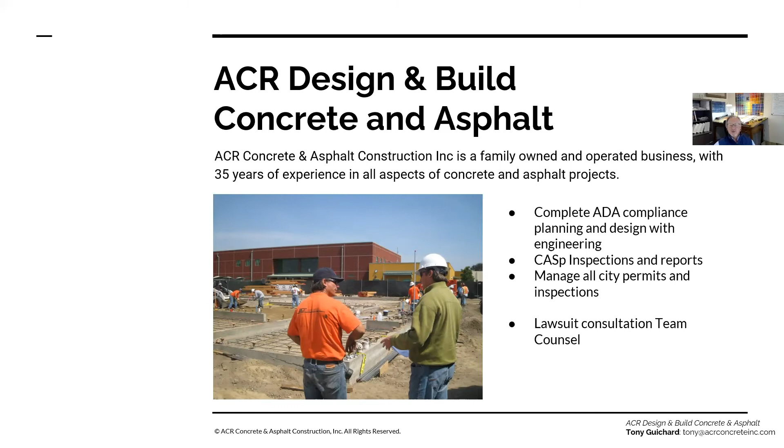I myself have been doing this for over 35 years. I carry a number of contractors' licenses, ranging from the highest, an A license, which is a general engineering license, to a B license, and multiple C licenses or specialty licenses with concrete, grading, compaction, things of that nature.

We'll just briefly go over the agenda for today on what we're going to be doing or discussing. Today we're going to be talking about retail shopping centers, the current state, the epidemic of ADA lawsuits and why they're growing, how to be proactive with your CASP report, the design, which is critical. You're going to hear me talk quite a bit and use

sentences such as the accessible route and the path of travel. Those seem to be lost with most with regards to ADA compliance. Corrections, CASP reinspection, and why that is critical. The ADA lawsuit, the case study themselves, we're going to actually review a complaint and the allegations within it, the importance of the CASP inspection in the report, good ones, bad ones, reviewing the actual property correctly for ADA compliance, and how to correct or bring the property into full compliance. So those are a couple of the items on the agenda today. And again, keep in mind, we're going to take a couple breaks here to field some questions.

The current state of retail and commercial centers. We're going to talk a little bit about the challenges owners face. Currently, with COVID-19, the owners are facing loss of rental income. A lot of these tenants that had to close up their businesses, the nail salons, the small restaurants, the donut shops, things of that nature have gone away. Some of them have been caught up in lawsuits, and the lawsuit settlement demand has been to a point where they couldn't sustain, and they had to close their doors. Now the owners are looking at a loss of rental income.

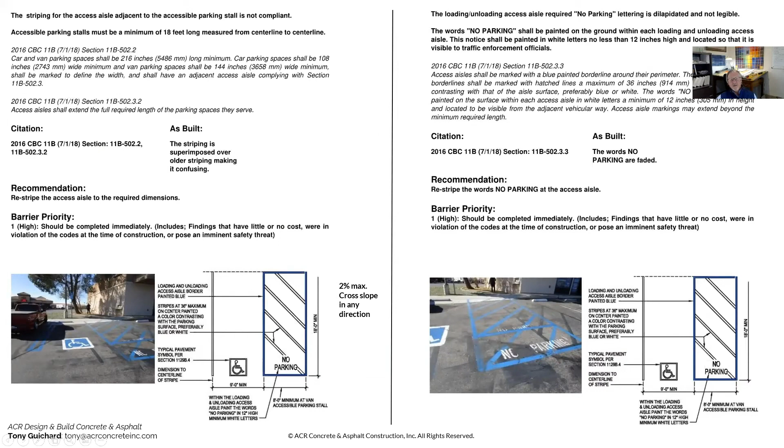So the owner has probably spent over 3 or 4 years, $3,000 or $4,000, and it cost them 25 to 30,000 because we have to go back to the attorney and say, here's the CASP report, that the allegations within the lawsuit are correct, and we do not have a good defense, because I can assure you the plaintiff has the same pictures. So as we move on, we're going to go into the accessible route, which again, the path of travel that I keep talking about is critical.

Now here is a brief picture taken right out of the California Code Book and federal. And what they're telling you is that it's a simple depiction on how to create an accessible route properly.

So this is our CASP inspection. If you remember in our lawsuit, they were talking about the accessible route from the bus stop was not provided. So the CASP report has taken pictures to either confirm or deny whether or not the allegations are true.

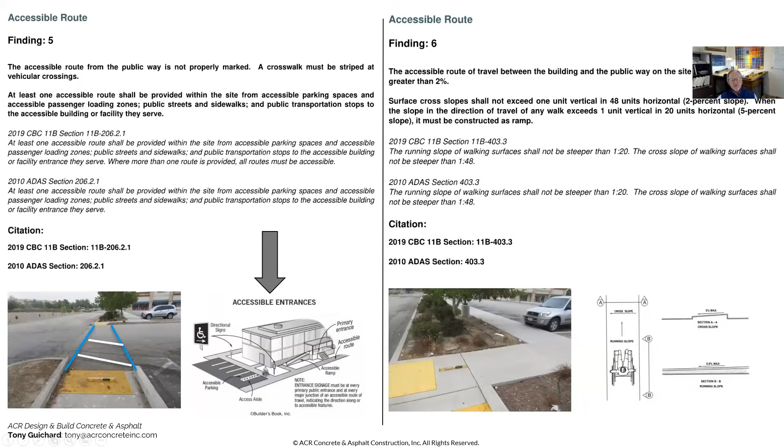Here we are, here's the level, here's a picture of the level, 3.7. So that tells us that it's almost double than what it can be.

The cure for this is this line here needs to drop down probably 1.5 inches to make it within a 2% max. Now, contractors see this 2% and they set their forms, and I can assure you that's what happened here. And they set them at 2% and they fail.

A good ADA contractor will set his forms at 1.5% maximum, and he will in turn end up probably, if he's a good contractor, 1.8, 1.9, and not exceed this.

The problem is once you drop this line down 1.5 inches, this slope now increases and presents problem 2. So we're going to go back in, as you can see on this page.

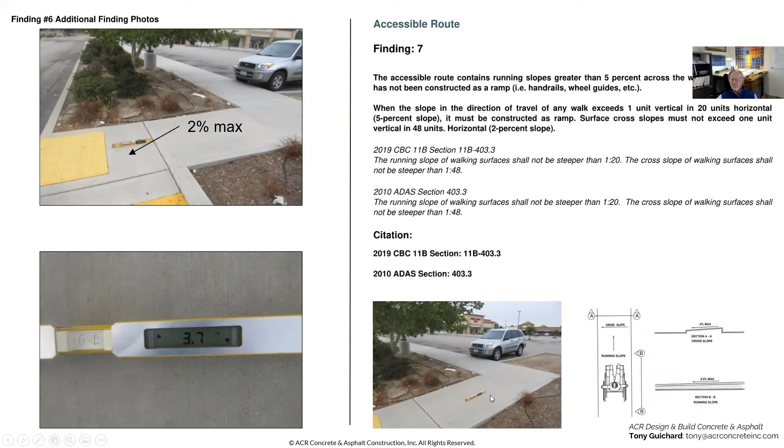Now the CASP inspector is working his way up. He now has his level here. He tells you it cannot exceed more than 5%. So let's go to the next slide and see what is actual.

5% maximum. We are at 5.5, so the contractor has exceeded it. So 2 more mistakes increases the settlement process for the owner.

So now this is already at 5.5. It can be corrected by actually installing railing. We can put a railing here and we can probably capture around a 7%. We cannot exceed 8.33%. So this area where this line is, we know has to drop down 1.5 inches, which is going to take that from 5.5, increase it to probably 7.5. So now we need railings on both sides of this portion.

Now we've got another landing here. So it's the domino effect. And that's what's so frustrating when a contractor doesn't have the experience, is now this whole area, probably from this sidewalk all the way down to the bottom of this ramp, has to be removed and replaced. You cannot just take a small portion within the accessible route and make it physically work.

So as we come back through, on the second page, we're still continuing on that sidewalk as we make it to the stores. And you can see again, this dome has the right requirements on the width. However, it's a surface mounted dome and these are coming loose. You can't see them clearly with the picture, but I've been out there and they are coming loose. Again, striping is worn and still has that old blue cross hatching, which is incorrect.

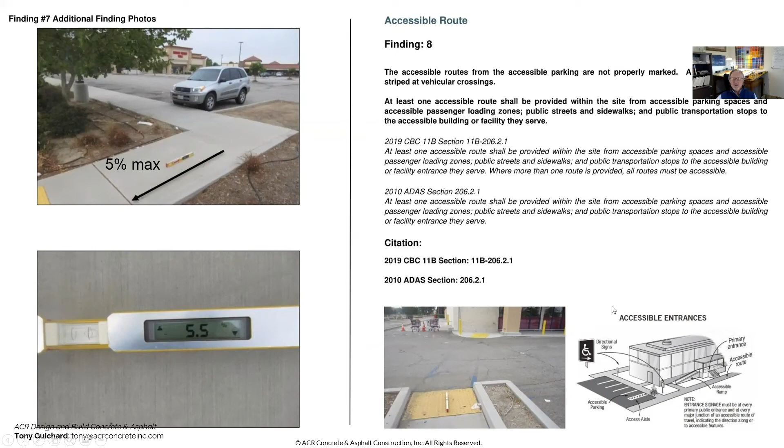So we're going to go into this particular property and we're going to look at a site plan. We're going to review the existing site plan that has poor ADA provisions. We're going to review how the existing site plan relates to the allegations. Review how the allegations differ from the CASP report per the site plan. And review a completed site plan showing a complete accessible route.

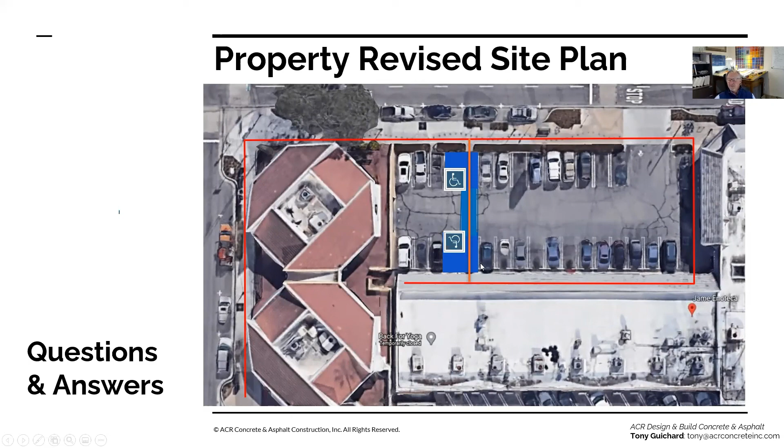Now, as we finish the outside and it's in perfect condition, we go back to that original lawsuit. Let's see if I can quickly go back to here. We come up to the top, it talks about doorways and service counters. So this particular individual went all the way back and took a look at the doors and put the doorways in the lawsuit.

So what we have to do is check the doors. Remember early on I said, according to the lease, the owner has the exterior, the tenant has the interior. So when it comes to the door, is that the interior or the exterior? The door swings out, the door swings in. These should be qualified in your leases, because this item can very easily be a $5,000 item.

In this particular case, it was about half that, about $2,500, because up here is the problem with the door. The disabled person said this door was too hard to open, stating that the door exceeds the maximum force to open.

So the maximum force, not timing or closing speed, but the actual force to open that door can't exceed 5 pounds of pressure. In this case, we had to take the door closer at the top of the door and replace it. Those cannot be adjusted; they're factory set, and over time they wear out. So this particular door, by the time we were done with it, was about $2,500.

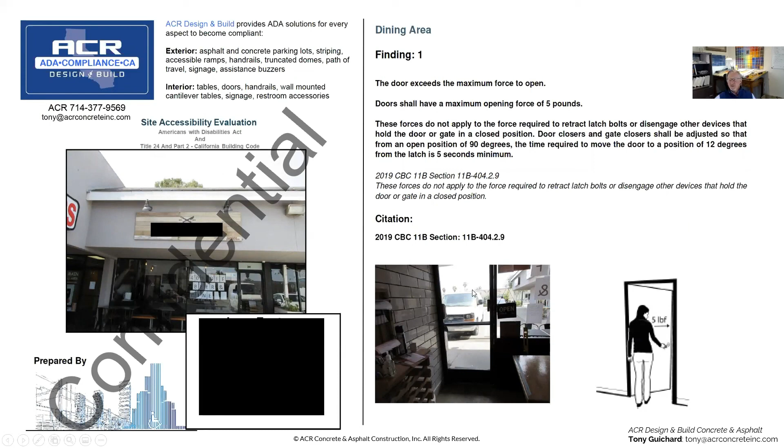Now, as you can see, the outside of this cafe, they have 2 dining tables, okay? If you have exterior seating, then a disabled person is allowed to enjoy that type of seating as well. Therefore, you need an ADA table, and that table needs to have the proper logo and information on it as well.

Now we sell them here at a restaurant grade. These tables are a bit expensive, but they're designed for restaurant grade and exterior use. They're anywhere from $700 to $1,000 with the proper legs, top, and logo, assembled and put together.

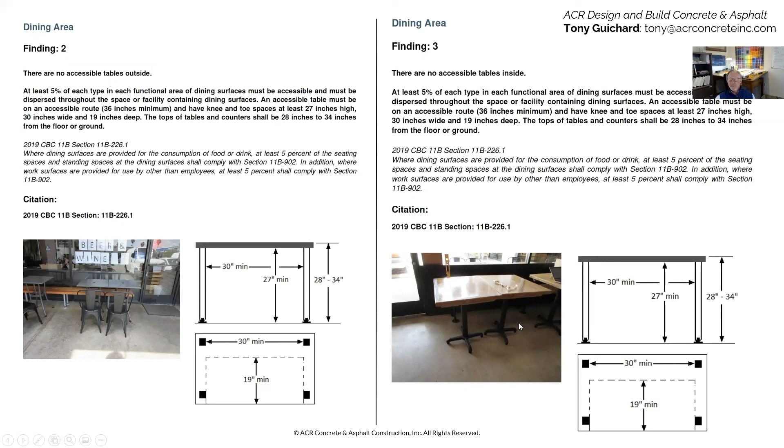So I'm just going to recap some of the things today that we've looked at. We've reviewed an actual lawsuit, we've looked at the allegations within the lawsuit, and we have our CASP report. We compare them. In this particular property, there will not be a lot that the attorney can do to argue.

Because the CASP report has the facts, the disabled person or plaintiff that filed the lawsuit has that information as well. So all legal counsel can do at this time is plead on behalf of the defendant, the property owner, and negotiate the best settlement they possibly can.

Now, after they settle that, it's critical to have the complete ADA team in your corner, because the next thing we're going to do is attack all the corrections in the CASP report and provide plans, permits, and a CASP-free inspection to show that everything has been completed correctly.

If you don't go down this path, you're gambling. If you only deal with the allegations within the lawsuit, the remaining corrections outlined in your CASP report - a lawsuit, whether it's a second, third, or fourth one - can be filed against you. So we're trying to take our clients down the path of complete compliance right off the bat.